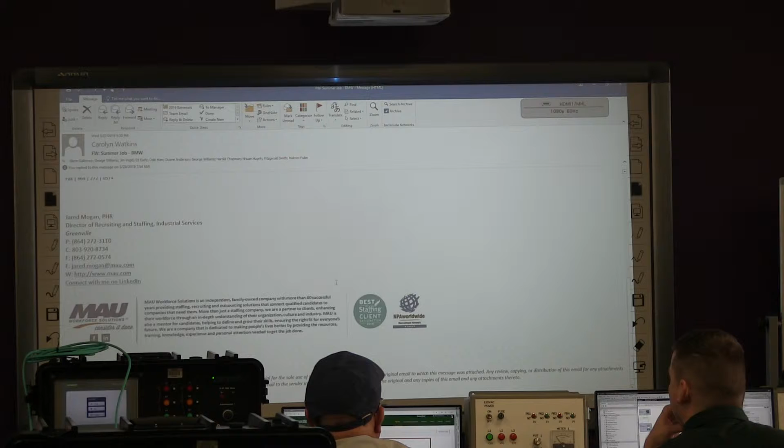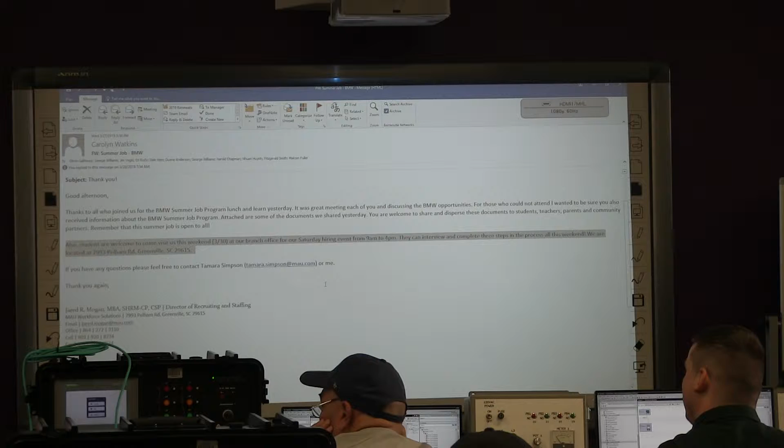Oh, that's for... Don't do it. This is MAU, that's what that is. Oh, is that what that is? Yeah, contract production. Oh, okay. I'm glad you guys know. As soon as it said Pelham Road, I knew. Temp job, don't do it. Stuck there forever. They don't really need it. Maybe something you don't want to be interested in. I don't know. Oh, so they're not real high about safety. Well, it's just line work, it's just the nature of the job. Makes sense. Okay. Here we go.

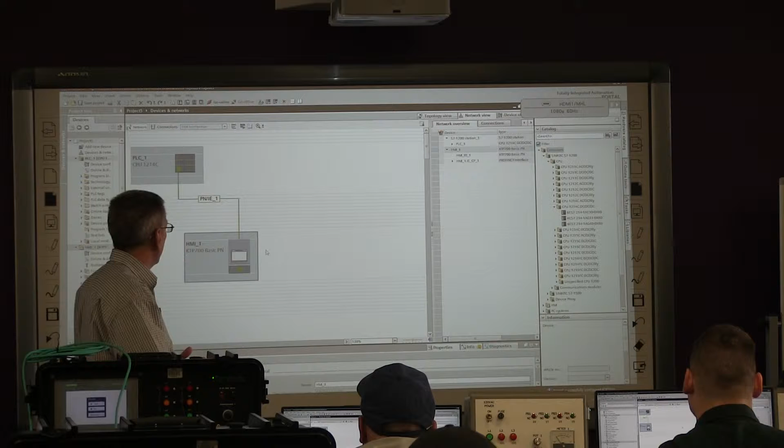Okay. Is everybody in the network view right now? Okay. What's the part number on that switch that's on the trainer? We'll go ahead and add that in. Scalance switch? If we can even find it.

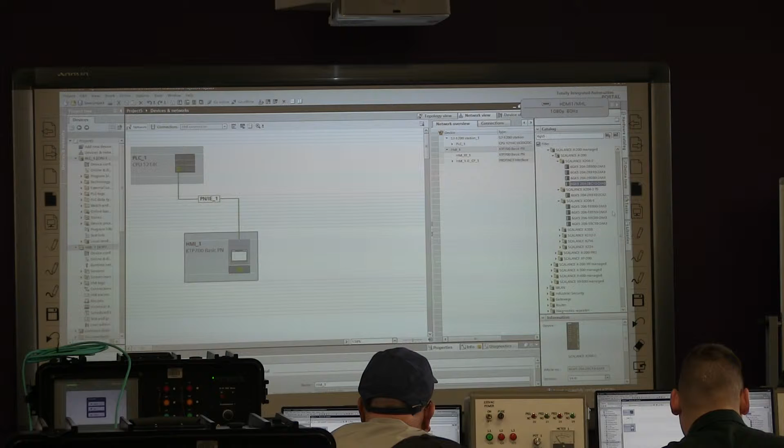So it's under network components, switches, Scalance, X200. Must be the only one out there. There's only 4 of them in that list. Well, there's another one. Try 6GK5005 015. Nope. Stop for a second. We don't have to add that in to get this stuff to work. I've never added it in before. I never could find it.

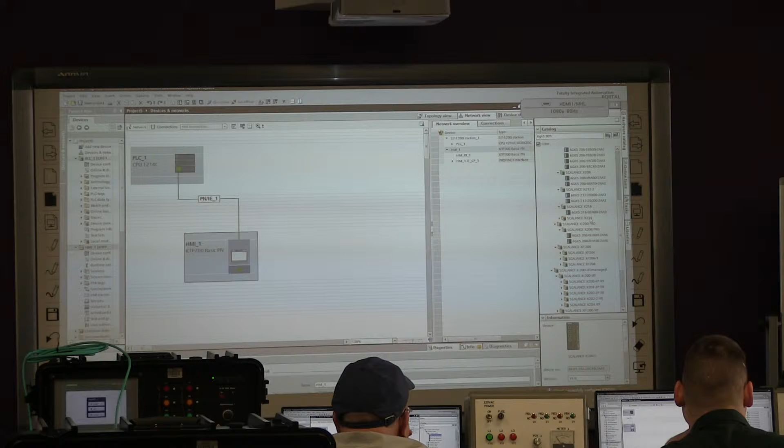It's a lucky day. It's a birthday. I don't think it's in there. That's weird.

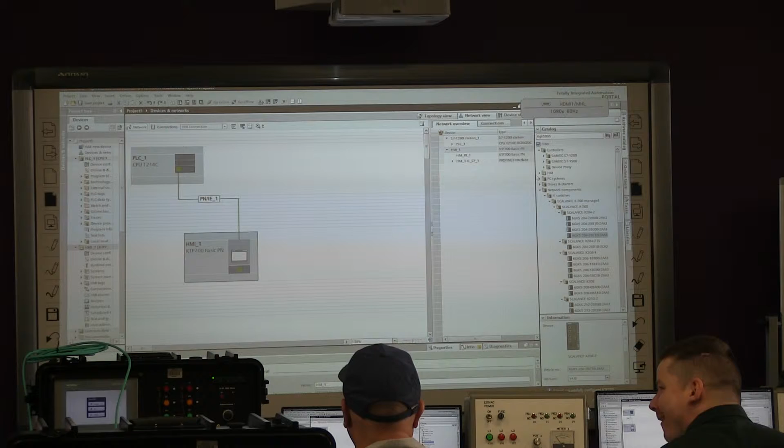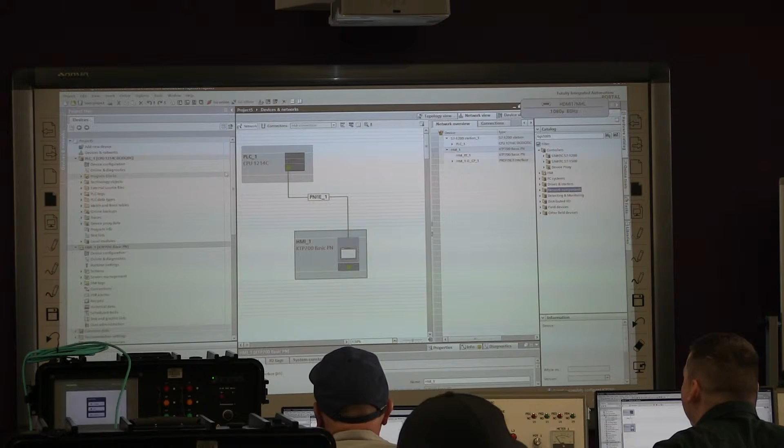Nothing. Okay, that's okay. We don't have to add it in. It's not a showstopper. Let's take a look at the project tree on the left. There's an area here showing the PLC, device configuration, online diagnostics, and then there's a folder called program blocks.

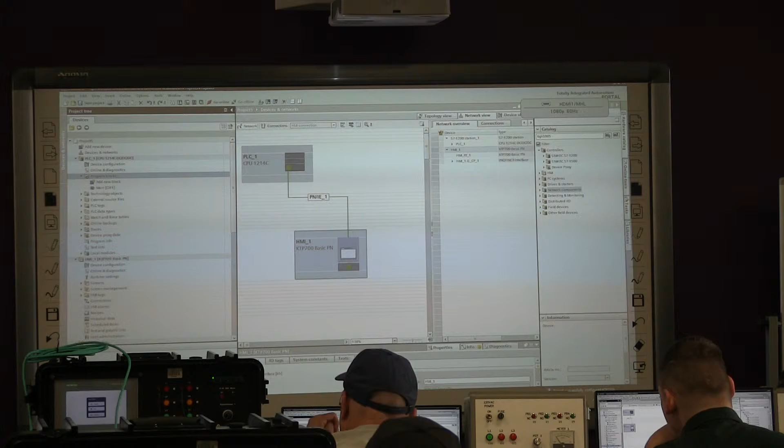Expand that. That's where we'll be adding in FCs and FBs, and we can add in OBs. We're not going to add in any additional OBs, we're just going to leave that the way it is. And then there's a lot of other stuff here, but this PLC tags folder, expand that.

Go ahead and double click on show all tags. You don't see anything right now, right? Nope. But there's three tabs up here. Go to the system constants tab, and that's showing all the tags that are related to the system itself, to the PLC. It's got the local stuff, that interface, so anything that's related to the PLC.

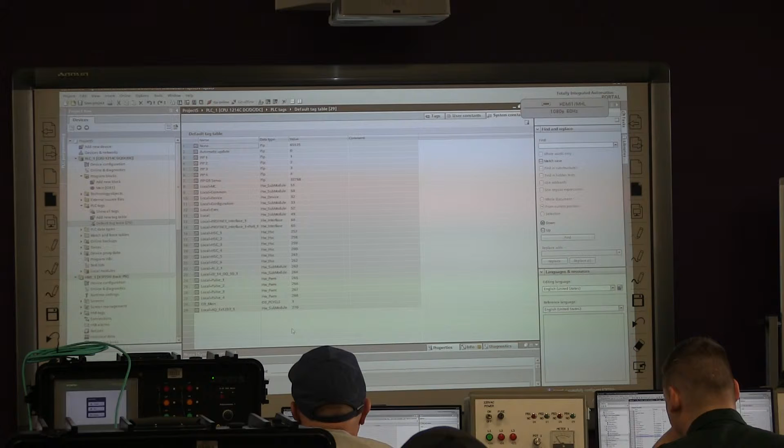And then we have this default tag table. Just double click on that. It says there's 29 tags in there, doesn't it? Yeah. Do the same thing, it's in the system constants again, and there should be 29 tags in that system constants area. But once we start building tags, the tags tab will be populated. Anyway, so we're going to add a new tag table.

Go ahead and double click add new tag table. And let's rename it. It says tag table 1, whatever. Right click and rename. We're going to name that inputs. We're going to add another tag table. Now you do that whole add new tag table. Add new tag table. Rename, tag inputs. And then add the second one in and rename that one outputs.

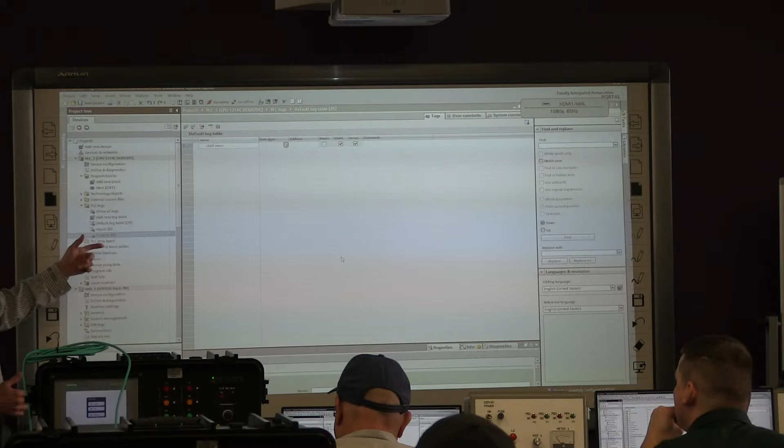It's just another way of keeping things organized. So if you have a system that has 1,000 inputs, a huge assembly line or something, put them all right there in one tag table. We could put everything in one tag table, right? We put inputs, outputs, memory. Later on, we'll also add a memory tag table for all of our memory tags. It's just a way of keeping them organized.

Let's go to the inputs tag table that we just made. Open up the inputs tag table. And we're just gonna make a couple tags. The first one, let's call it start underscore PB, enter. So it automatically populates the address for you, which is good. That's easy. Next one, stop underscore PB. Same thing. And while we're here, go ahead and check the retain box.

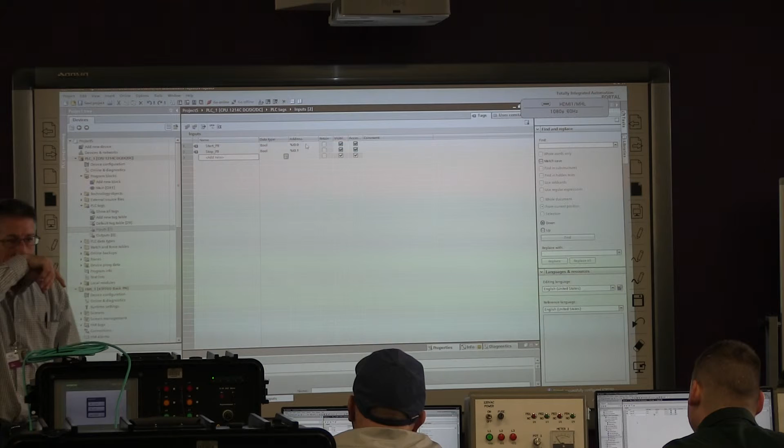No, but I'm glad you said that. Generally, you use it on memory tags. If you look at this retain box, what do you think that's for? That's for the retentive memory. That's exactly right. Generally, we would do it on memory tags instead of actual I/O.

While we're here, up at the far right corner, hover over the options up here, and one of them says float. Go ahead and click on that where it says float. Now we can take this and move it around. And go ahead and exit the one that's back behind there, and exit the other one until you get back to your network view.

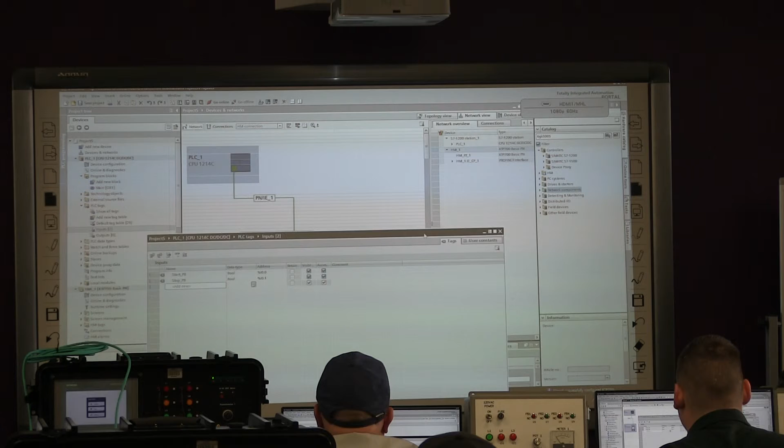It's starting to be like fun. Like a video. Yeah. I digress.

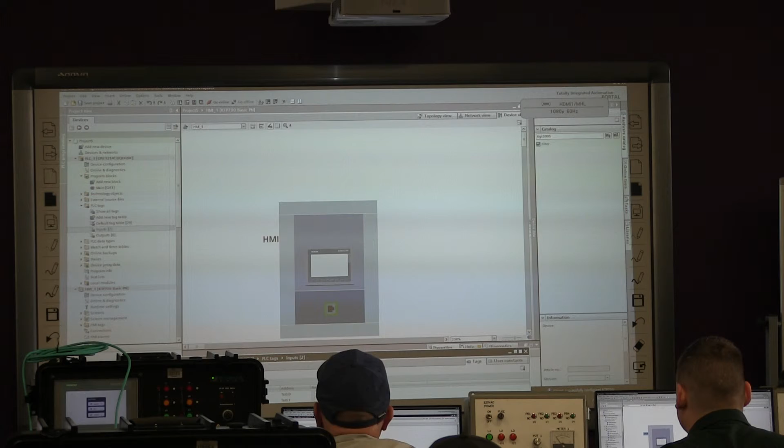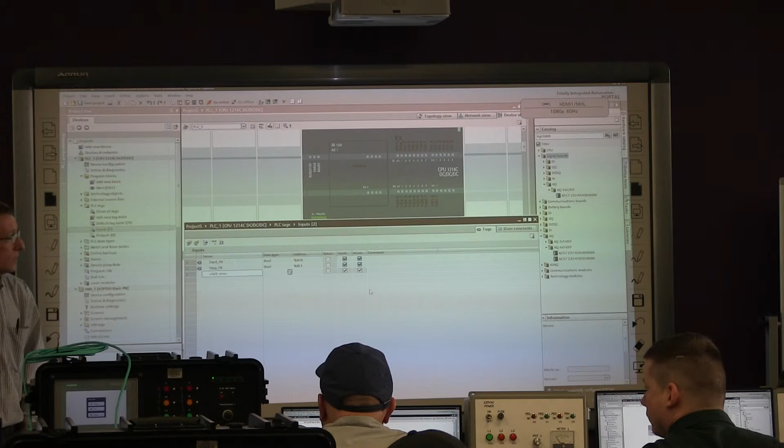And then, now let's click on device view. And in device view, let's use the drop down and select the PLC, PLC 1. And scroll in, zoom in, where you can see the inputs and outputs. And then drag up your tag table. So it places the tag names on the PLC once we do that.

Another way that we can build tag tables is by clicking on one of the inputs. Let's click on one of the inputs that aren't being used. Just click it, drag it down, and drop it into your tag table. So I clicked on an input, drug it down, dropped it into my tag table. Now you can just rename it.

That's cool. Question. By dragging and dropping the inputs, you were talking about moving your wires. So instead of physically moving it at the PLC, you can do it digitally? Let's see, we would still have to physically move the wire, yeah.

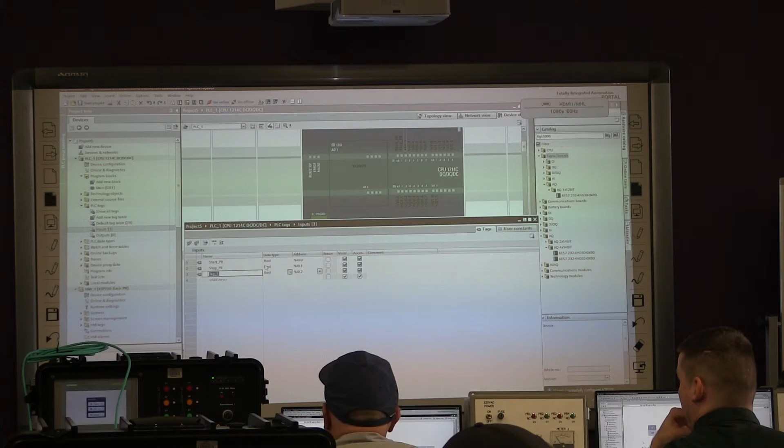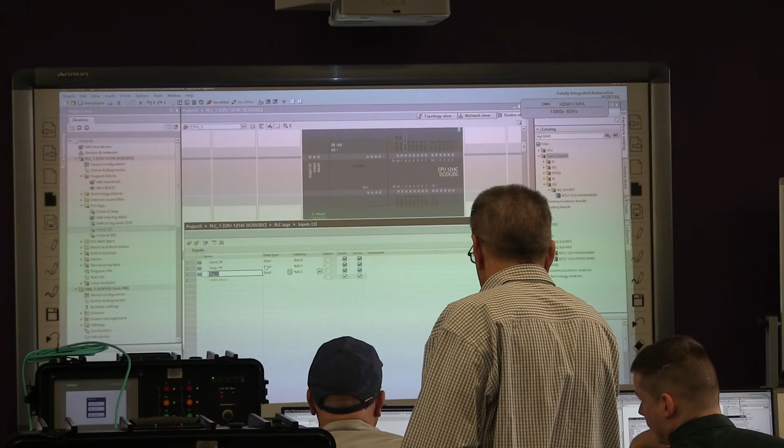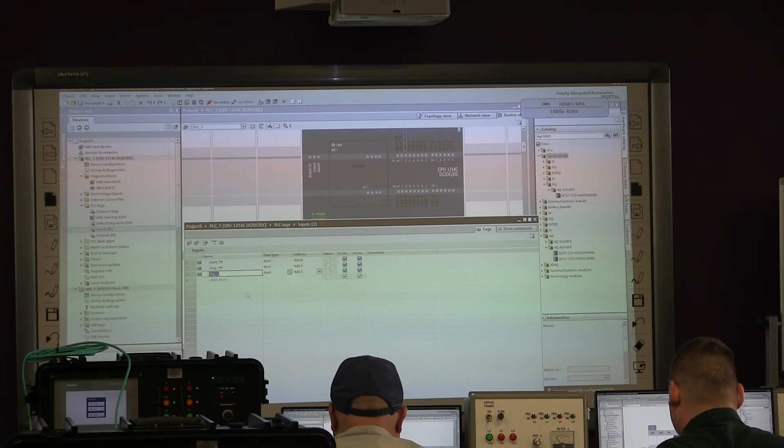Before you go too far, I might have X'd out of something. Can you show me how to get back? I've lost one screen. PLC. So, try to get back to that. And here's my input. And go back to my inputs here. And then exit out. Click on it, drag it down, put it in. Okay, this one. And then, there you go. Add here. Good? Okay.

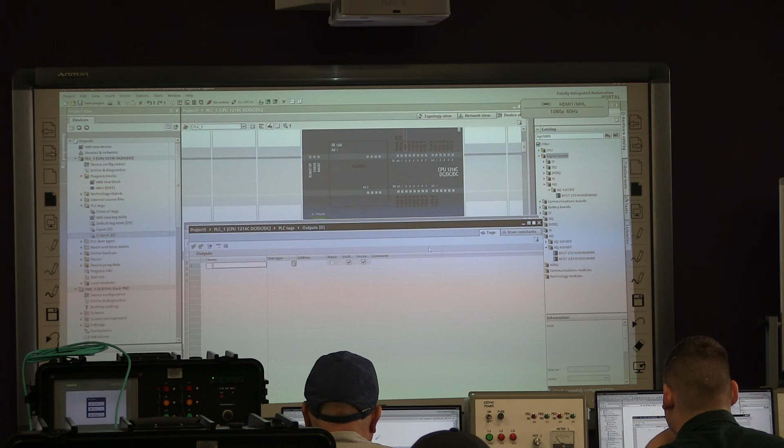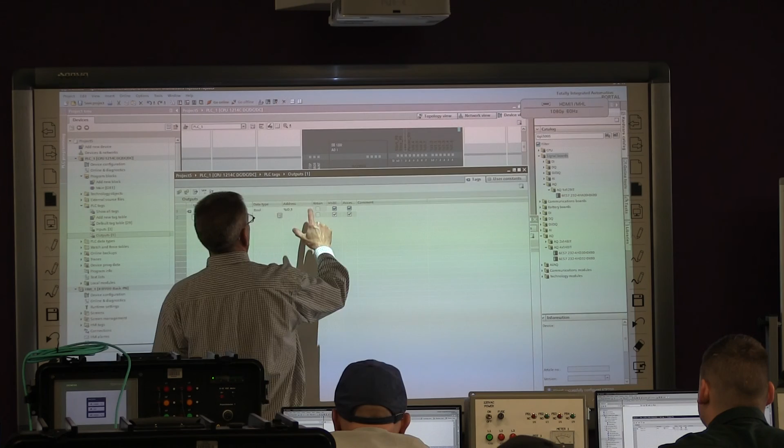Now, let's go ahead and open up your outputs tag table. And we're gonna make a tag called just power underscore on. Hit enter. And here's where you have to be careful because it's gonna use the next address in sequential order. So you can change it here, use the drop down arrow and change it here. Or you can grab the first one and drag it down, or you can do it that way.

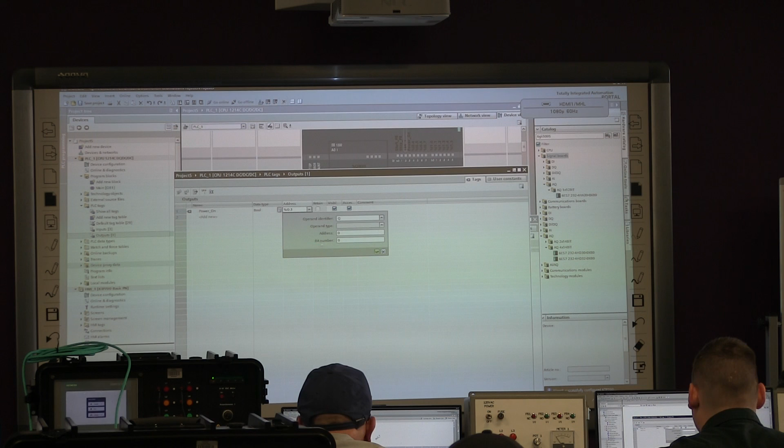It doesn't notice that's an output, it doesn't care what your name is. Zero. And make it bit number 0. So the operand identifier should be Q, address 0, and bit number 0.